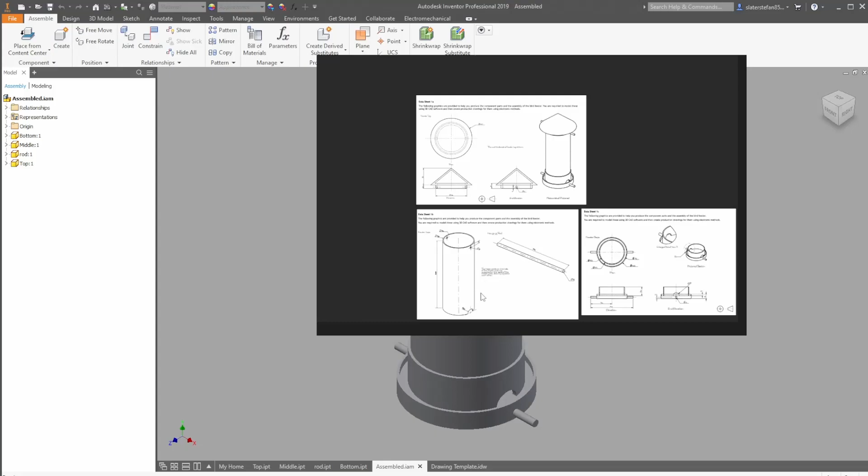Alright, we're going to be making this part of the National 5 graphics assignment. It's pretty simple for the most part - a couple revolves, a couple extrudes.

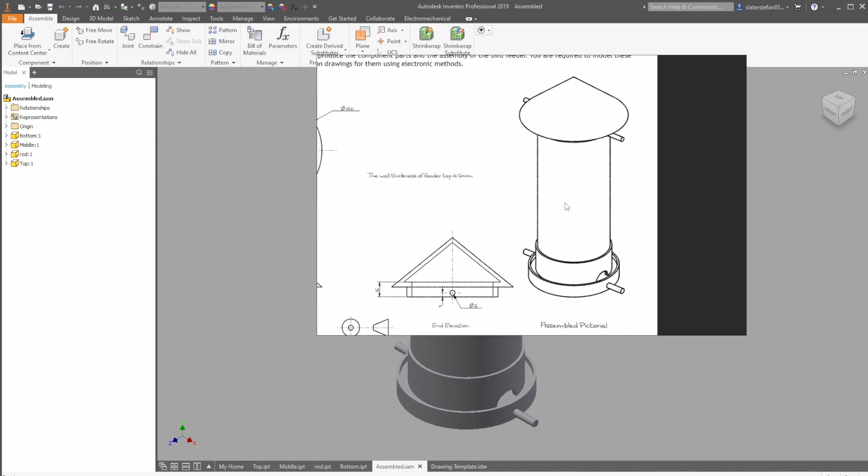This part's probably the hardest, but I'll show you some really easy ways to break this down and make it super simple for yourself. The assembling and constraining can be quite tricky - you can get yourself mixed up quite easily when you're doing this, but I'll show you a good strategy to make this pretty simple for yourself.

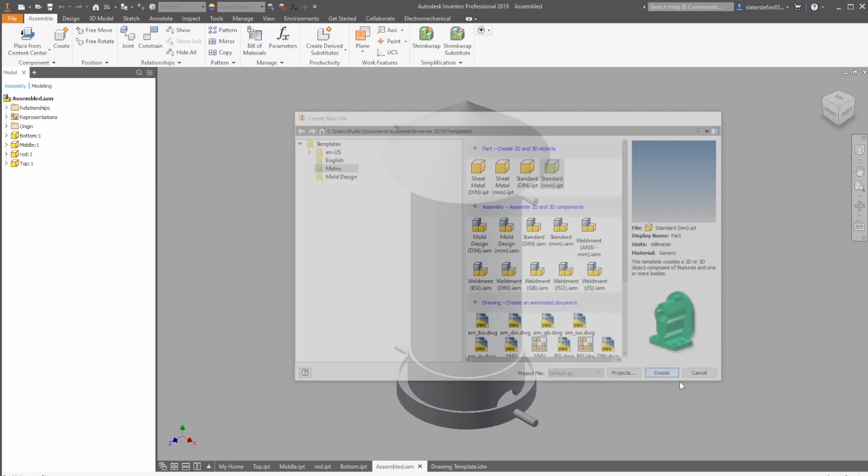I'm going to go to new, go to standard, and create a new part. I'm going to create this part first of all. I'm going to do a revolve, so I'm looking at this profile here. It's going to be a triangle with the size of 50 up, and it'll be 60 along, and this rectangle here going from 45 along and 10 up.

Start 2D sketch, click a plane, and I'm going to be dimensioning as I go as well, so rather than clicking and then going to my dimension, I'm just going to be typing in sizes. I do that by just clicking once, getting my mouse going the way I want to, and then I type in the size and click enter.

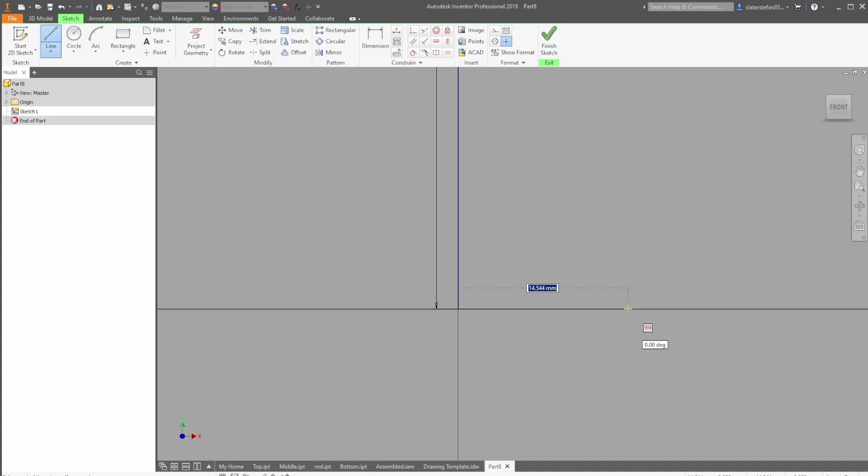Click escape, and I'll do the bottom part. I'll click, get my line in the way, and then type in 60. So I've got 50 by 60, and I'll just close up the triangle there.

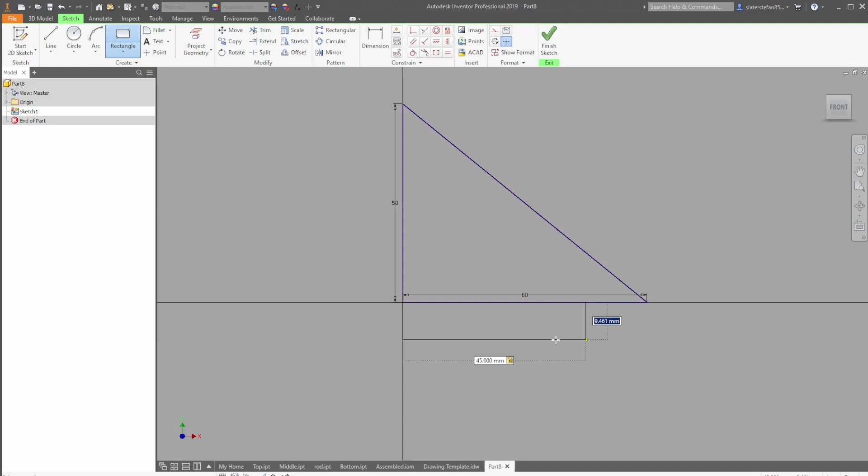I'm going to do a rectangle. I'm going to click once and move my mouse in the direction I want to go, and it's going to be 45 and then 10. To move over to the other dimension, I'm just going to click tab, moves me over, and I can type in 10 as well. You could totally just draw it and then dimension it.

Doing it that way just saves a bit of time and you get used to it, even though it's a wee bit fiddly. I'm going to now finish my sketch. I'm going to revolve it, click my 2 profiles, click axis, click my axis, and click OK.

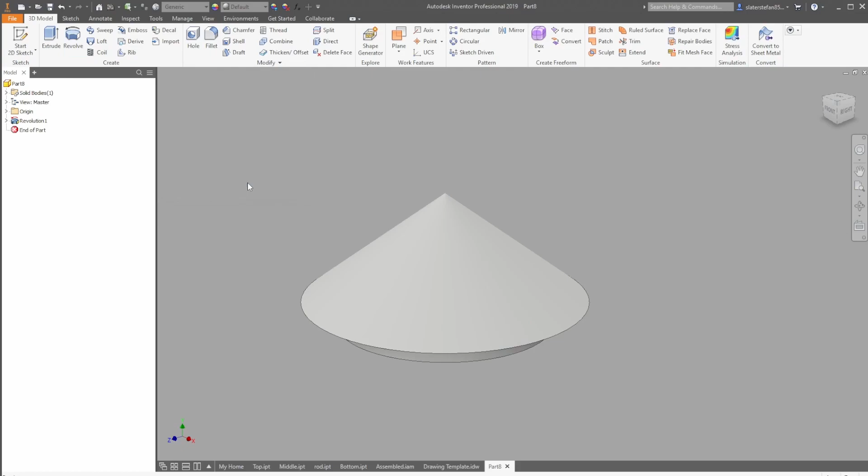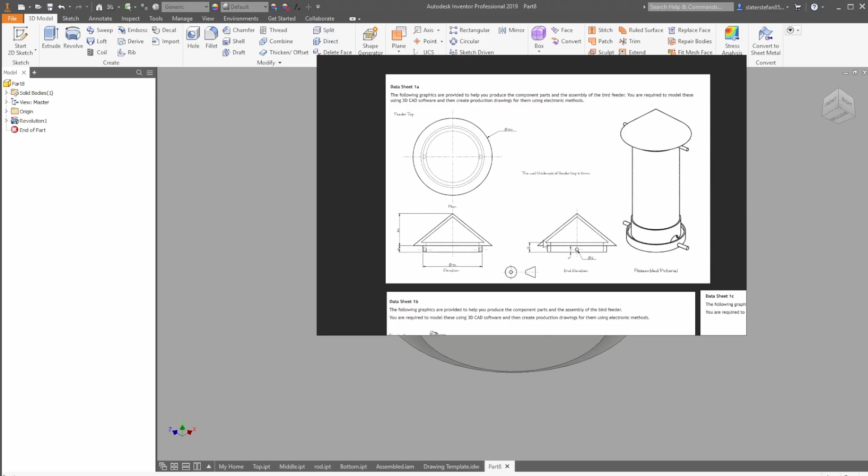Now what I need to do is shell it. It says here that the wall thickness of the bird feeder is 5mm, just this top part. And you can also tell by the hidden detail running all the way down to the bottom that this face is also removed. You don't really be able to tell that by looking anywhere else apart from this, so we know we need to remove this face.

So I'm going to go up to shell. I'm going to change this thickness to 5. I'm going to make sure I'm on remove faces - it'll do this by default, so you shouldn't have to click anything, and then you can click OK.

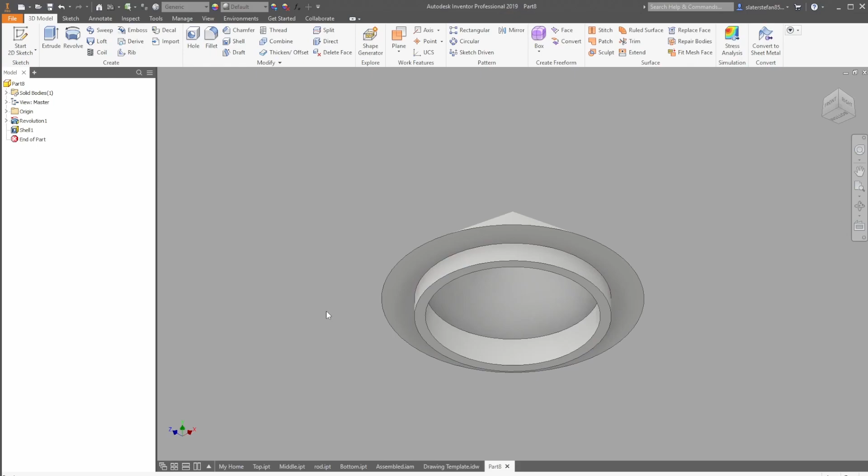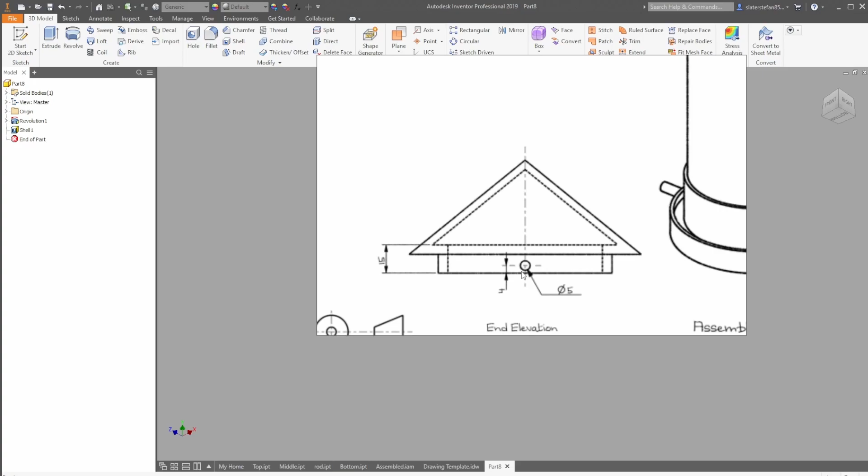Now what we need to do, it's almost done, we just need to get this hole in here, and it's really important that we get it at the right size so that when we come to assemble everything, everything's fitting, and making sure that it's the right distance away from this edge is really important as well. So it's a diameter of 5, and it's 4mm up.

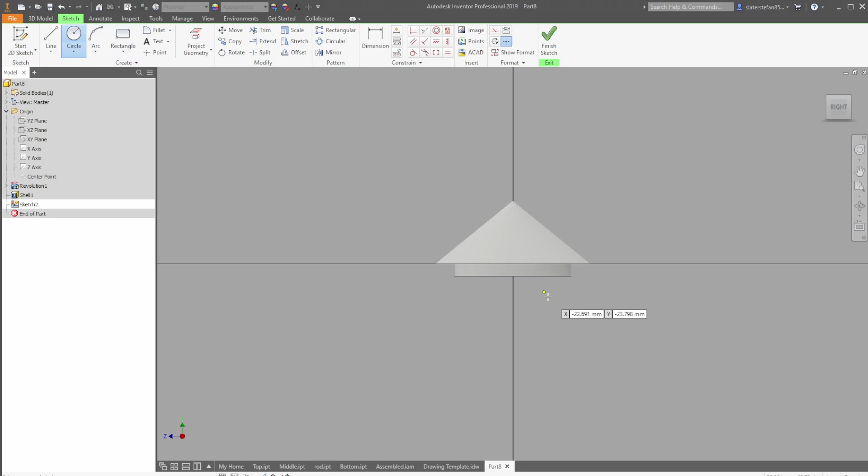I'm going to do this by starting a 2D sketch. We can't start a 2D sketch on a cylinder, so you need to go up to origin and click a plane. You could create an offset plane, but I'm just going to do it in the center and sketch it while it's a wee bit hidden. So I'm going to go to my origin, make sure I'm on that, just so I'm snapping right into the center of this.

Means I don't need to do any other funny dimensioning. I'm going to just type in 5, click enter, click dimension, and select the center of this and the bottom of this and make this size 4. Finish sketch, and you can see it's just floating in the middle.

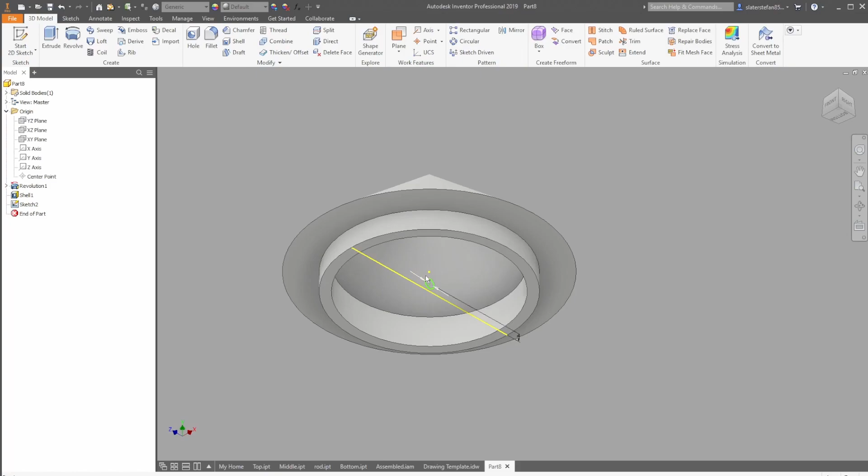So when I go to extrude, I'm going to go both ways. I'm going to go to cut, and just drag this out until it makes a hole, and click OK. So that's this first part done.

I'm going to move on to the next 2. They're pretty simple. I'm going to also save this, make it all into a new folder.

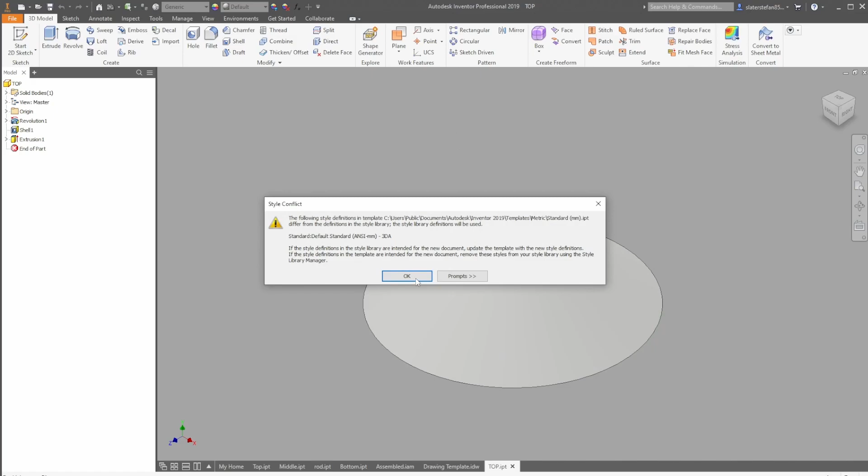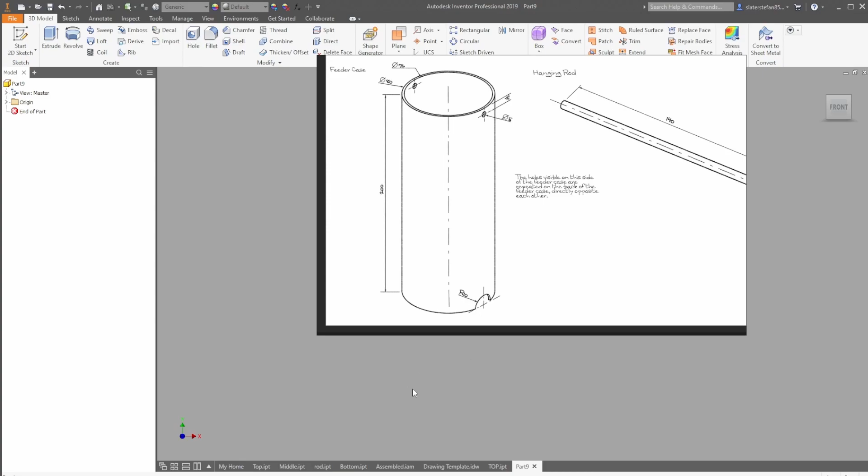Pull this top and create a new part. Only need a few sizes for this one, so we can see that the outer ring is 80, the inner ring is 76. Same sort of thing over here, but this is 6 down and 5. And this is a radius of 10, so really make sure you're paying attention when you see a radius, that when you type in you're not doing 10, because we'll have to make sure we're halving it.

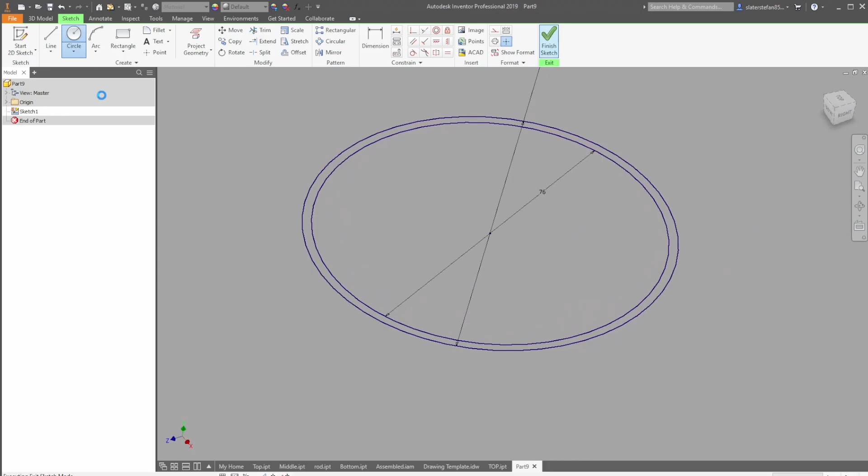So file, sketch, first circle, whoops, first circle is 80. This time I'm just going to make sure I type in 76, and then click enter. Finish my sketch, extrude, and I'm going to make this 200.

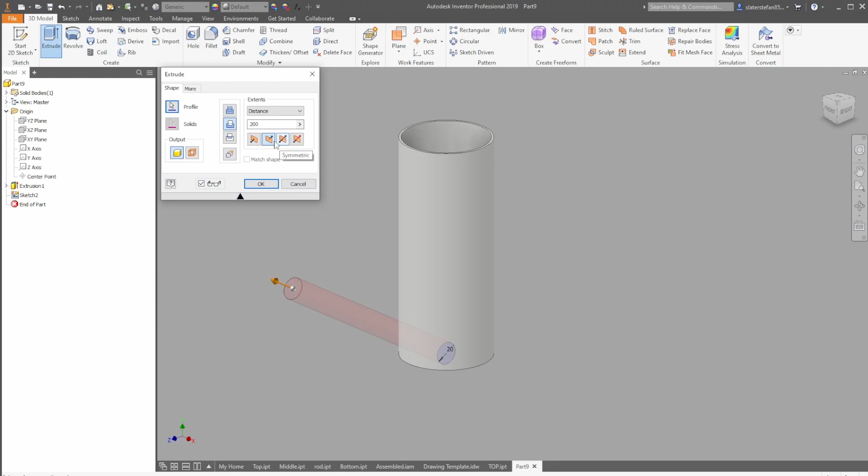Now, same thing as last time, I'm going to start a sketch on my origin. Do the bottom first. So this time I'm typing in 20, even though it says 10, because this is our diameter when you put this in. This time I'm going to send it this way. Don't need it that big. Just make sure you're on cut.

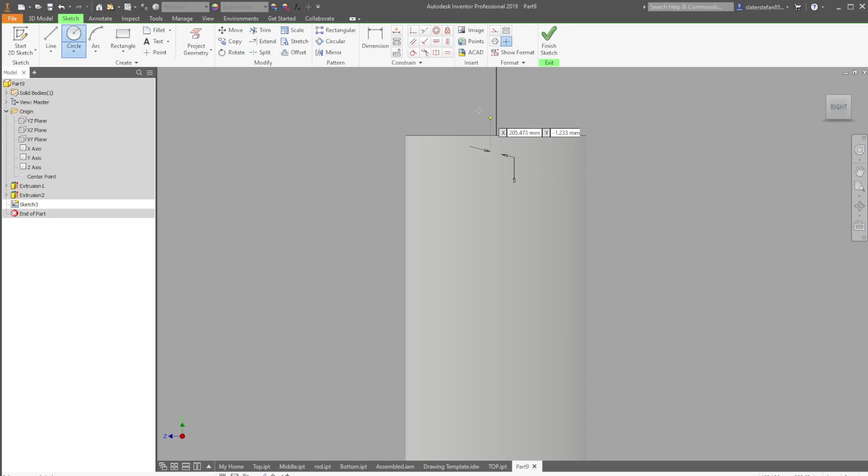And same thing. Make sure you're on the same plane. Make sure you can see this dotted line so you're on the axis. And it's 5 and 6. Finish sketch, extrude, symmetrical, cut.

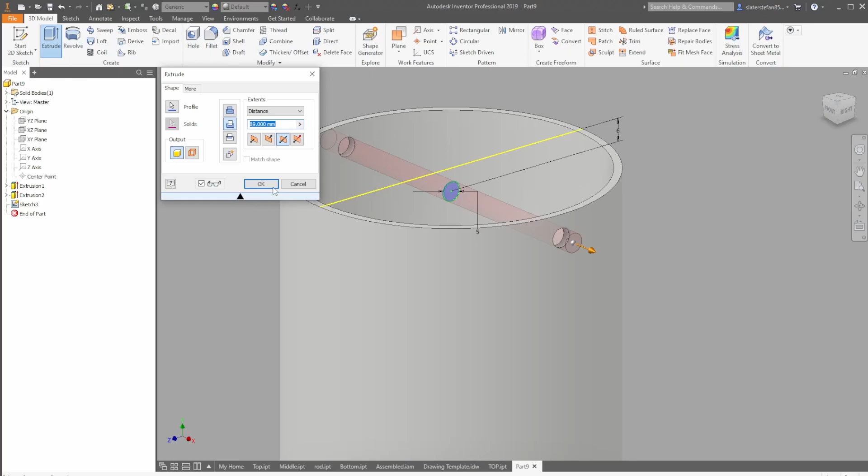And there we go. I think I just didn't drag it far enough that time. So that's that second part done. I'm going to save this, save as, call it middle, and create my next part.

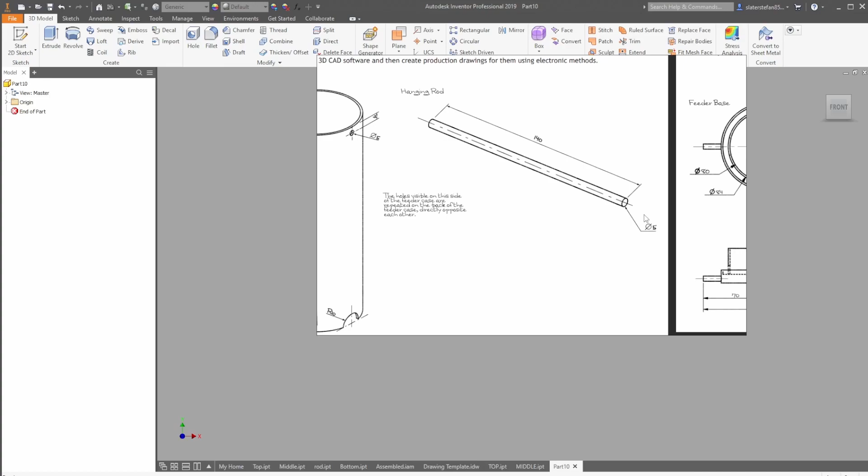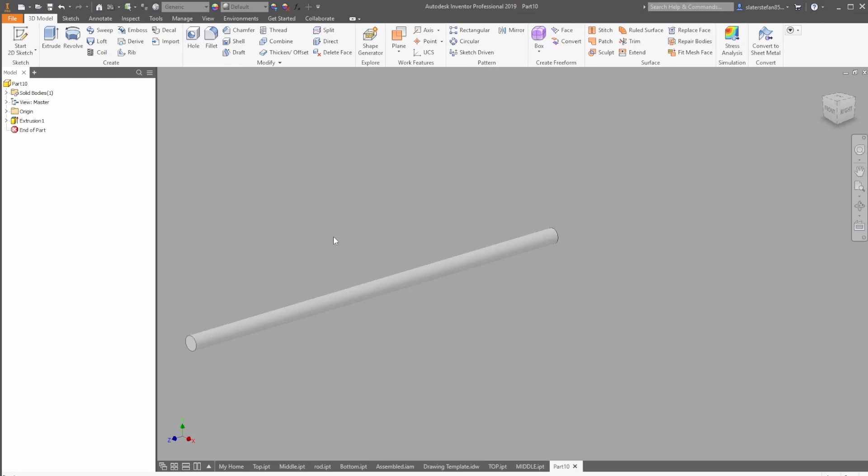So this part, pretty easy, 5mm by 140. Circle at 5. Finish sketch, extrude, 140, and there we go, that's the rod finished. File, save as, rod.

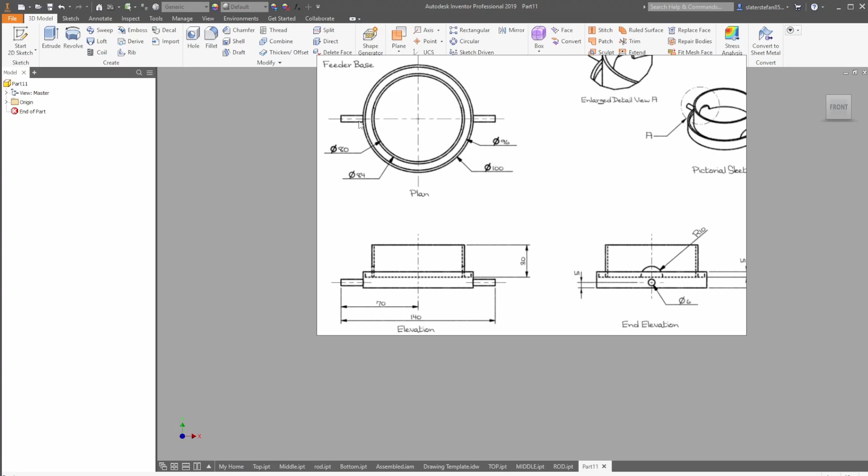Move on to my next part, file, new, and this part is probably going to take you the longest, but it's pretty simple once you break it up. So I'm going to do this base part, and then this ring part, and then this inner ring part, and then the sort of rod going through, and then the little cutout part as well.

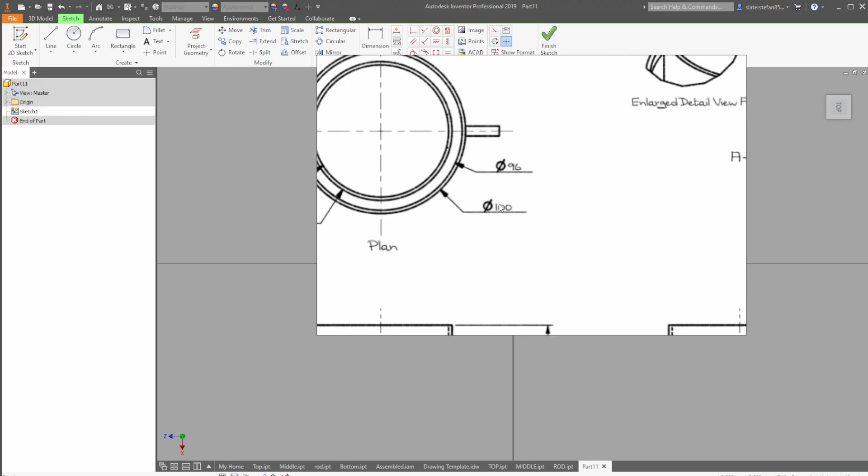So start off with this bottom part, which is over here. So I'm going to do a circle at 100, then extrude it up by 10. So it says 15, but I'm going to do my next ring at 5 up. So this one's just going to be 10. So 100 by 10.

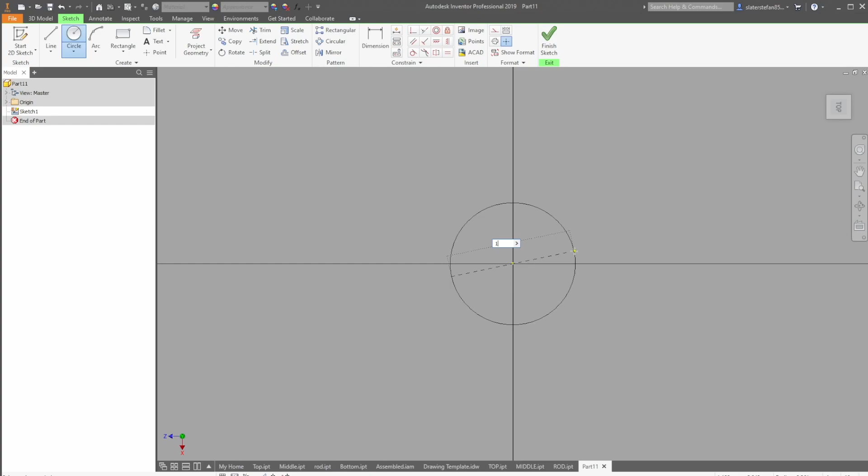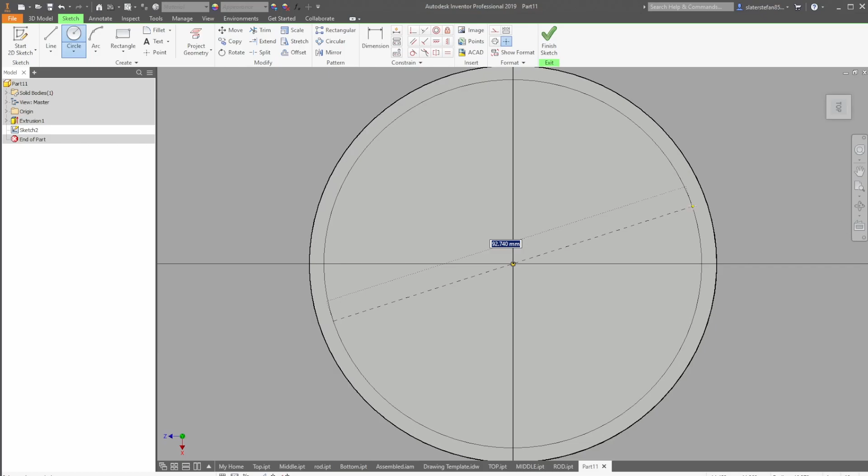And then my next ring, 100, and it is 96. And this one's going up 5. Then all I need is this inner ring, so the size is 80 and 84.

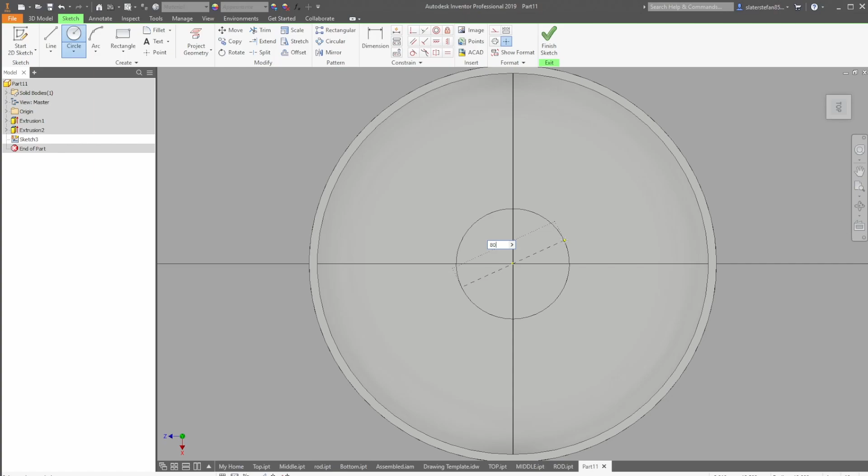Finish sketch, extrude, click my ring, and this size is going to be up 30 from the base.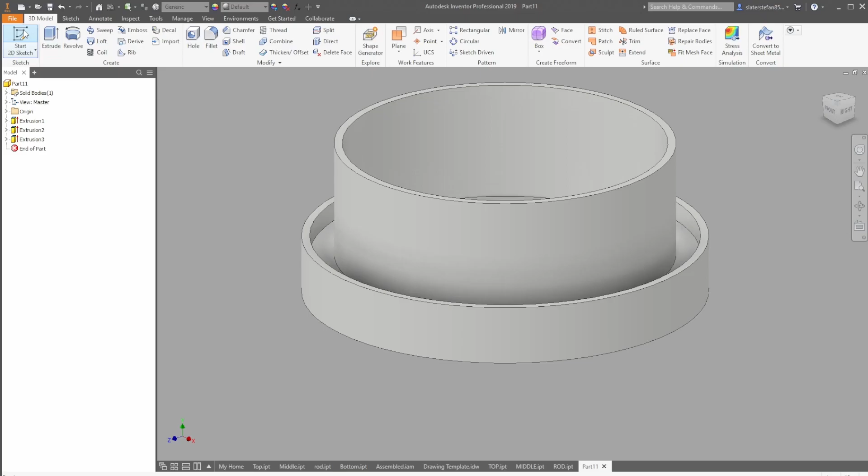Next part, going to just be drawn onto this plane again. Make sure I snap to the bottom of the base, and this side is going to be 20. I'm also going to draw a line on the base, just going straight across. This will just allow me to trim out this bottom part.

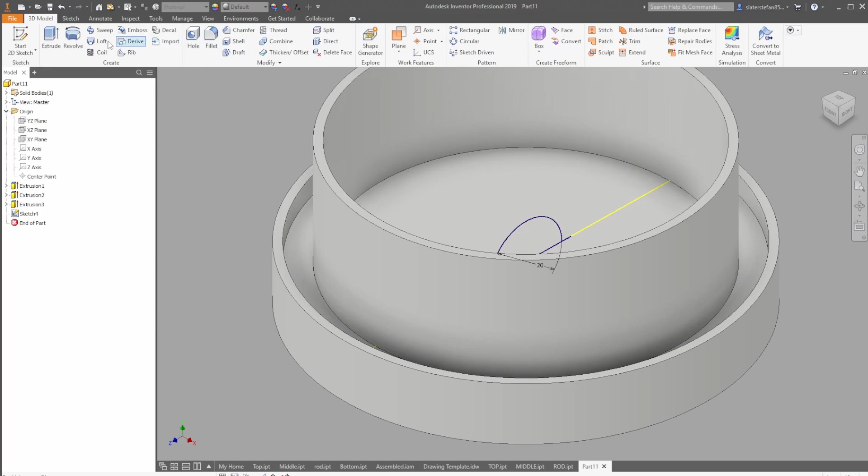Finish sketch, extrude. Do symmetrical this time, go both ways, and make sure that you're not cutting out any of this inner part, and click OK.

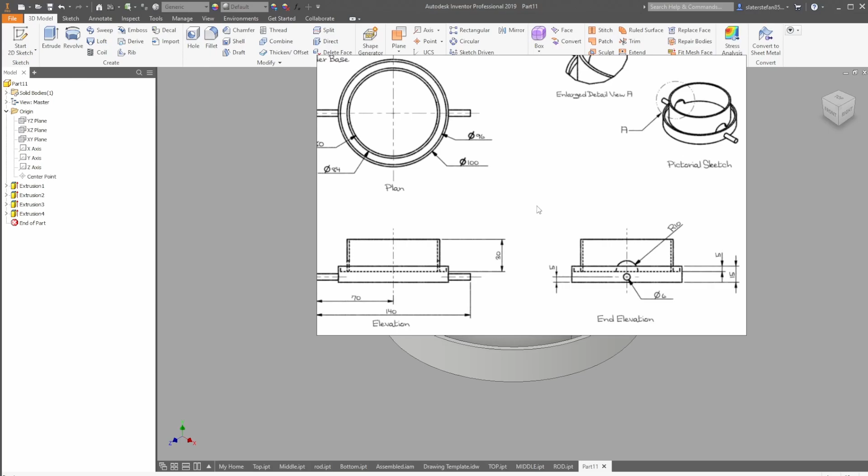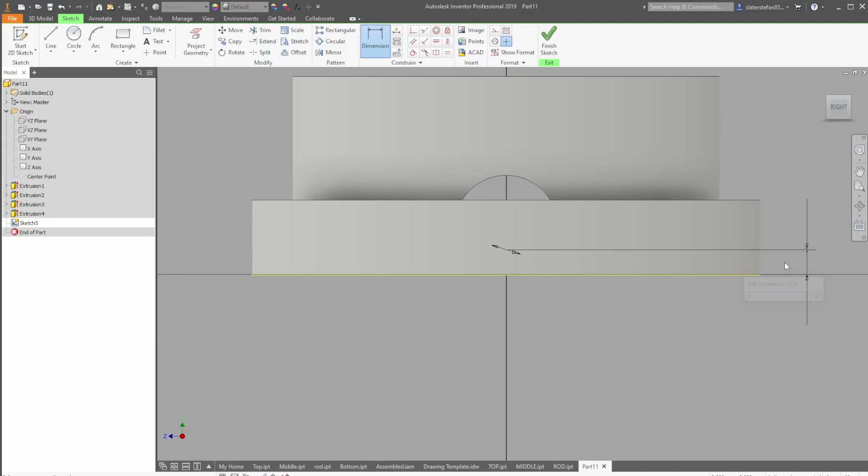And a similar sort of thing for this rod. It's going to be going the same axis, and it is 6 and it is 5 up. So, again, symmetrical, and this one has a size, so 140, and click OK. So that's all our components.

I'll save this part.

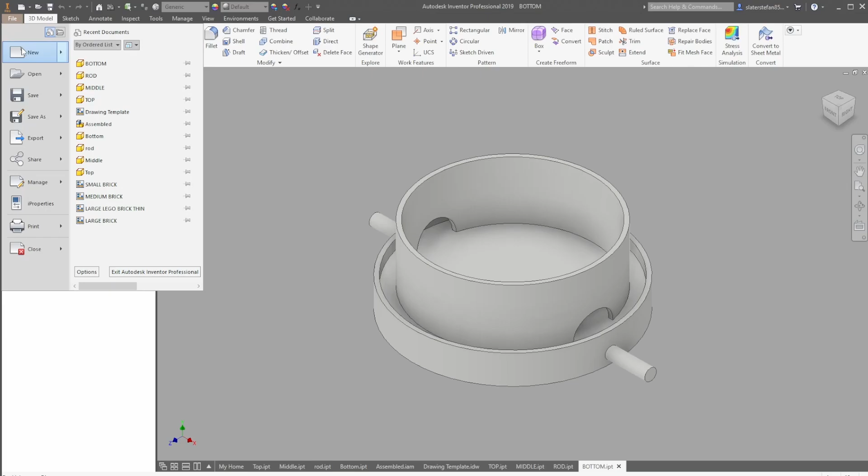This time I'm going to go File, New, into Standard mm.iam. Then I'm going to go to Place, select all my parts at once, click, and then right click and click OK.

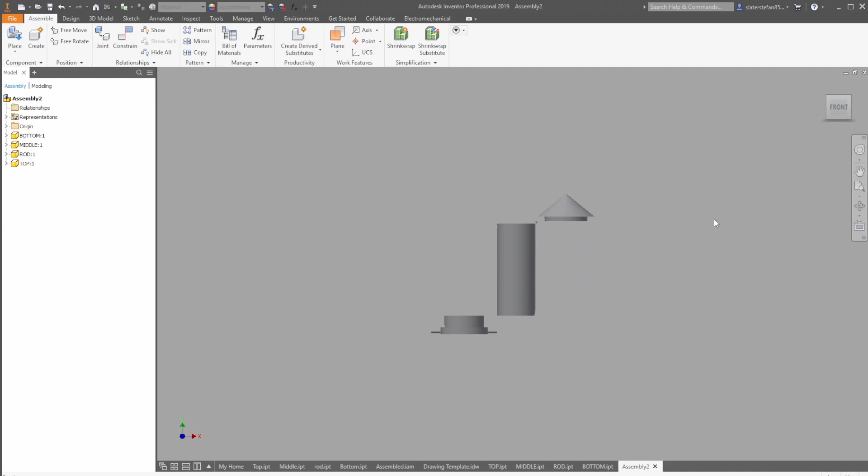So this is really the trickiest part. So far that's all been pretty easy. I'm going to first try and get this all assembled so I can still move it up and down, so I can see underneath it.

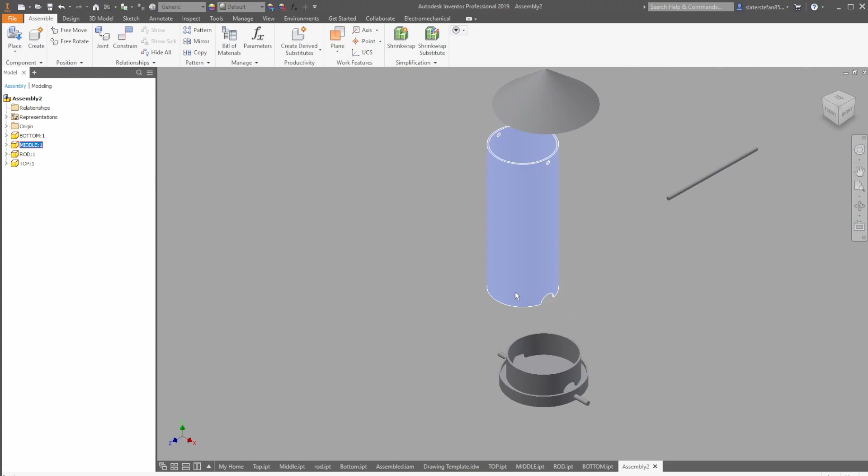So these 3 parts all assembled with just a simple mate, so these faces are all touching - the outer face of this and the inner face of this, the outer face of this and the inner face of this. Then put the rod in, put the rod into this part, and align the rod to this rod so that it's all in line, and just put this into place.

Sometimes it can take just a few attempts, so don't be afraid to remove any constraints or just undo and go back to the start and try again, but I'm trying to make this as simple as I can.

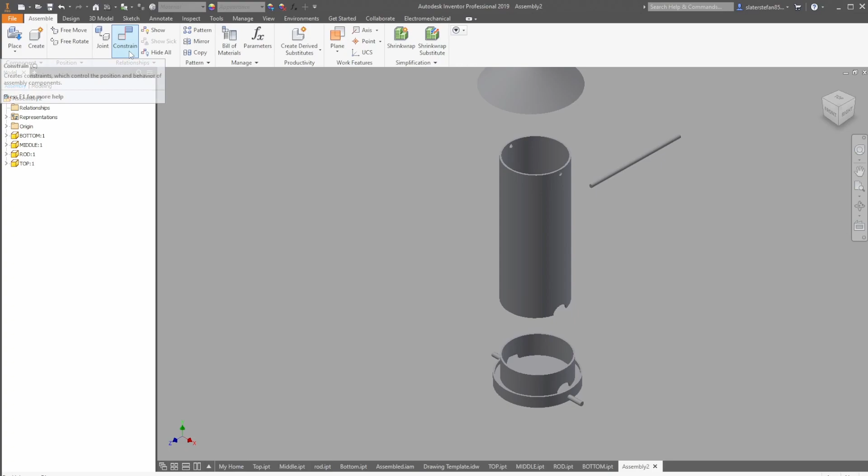I'm going to go to Constrain, and click Mate. It's already going to be selected. I'm going to click this outer face here, and then this inner face, and that will join them together.

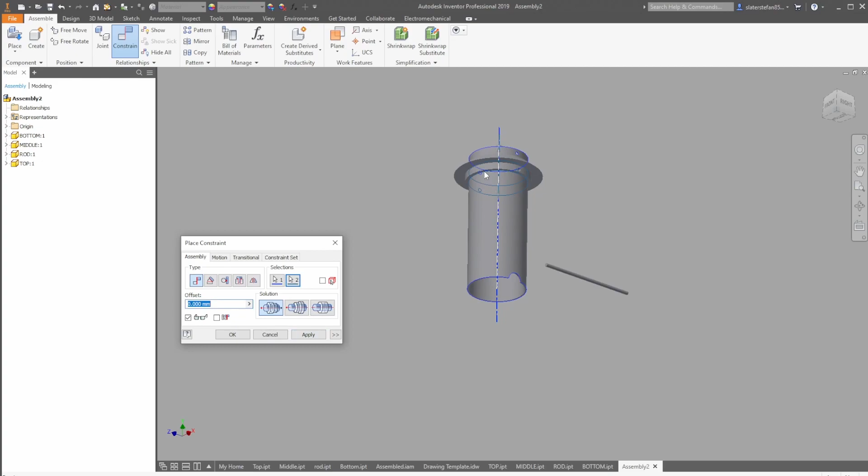If it puts it in upside down, you sometimes need to move this all around, but this is fine for me, so I'm just going to click Apply, and cross this off just so I can move it up and down. So I can still move this pretty freely, which isn't what I want in the final, but for now this will work.

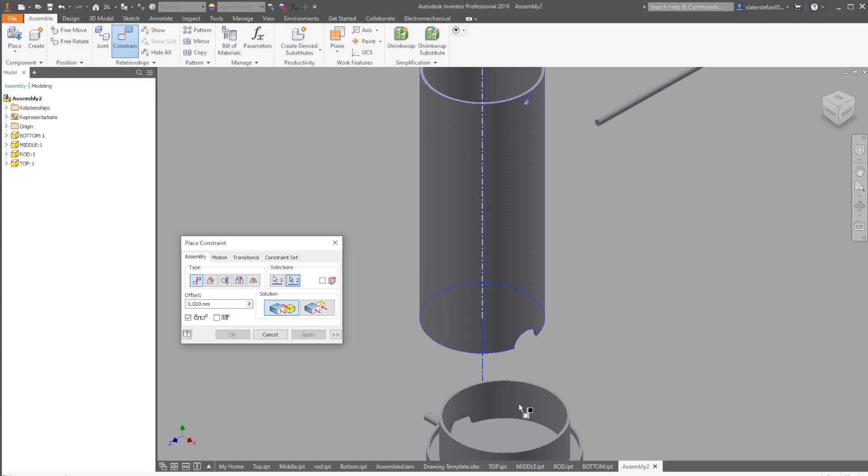Then I'm going to do the same with the bottom. Go to Constrain, click the outer face, click this inner face, and in this instance it has flipped upside down, so I'm just going to click that, click Apply, cross it off and move it up. So I can spin this round, move it round, and move it up and down.

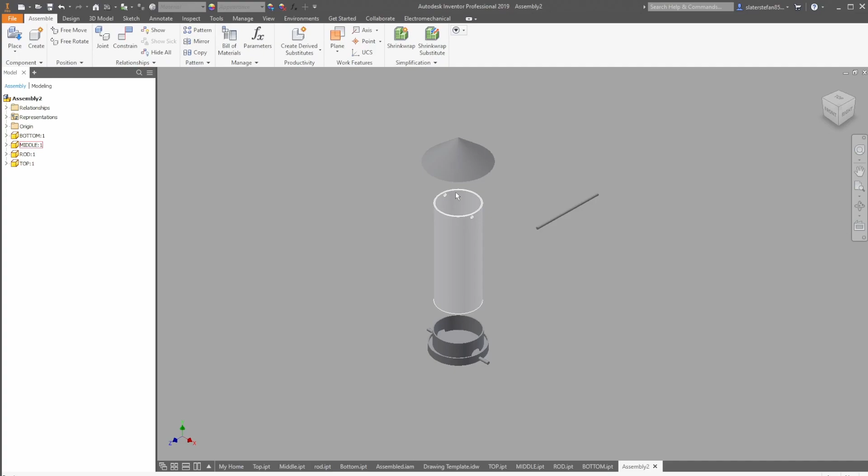So now we just need to start aligning these things. I'm going to align these both first. So there's 2 holes - one on this top one and one on the bottom part. I'm going to use the rod to align them.

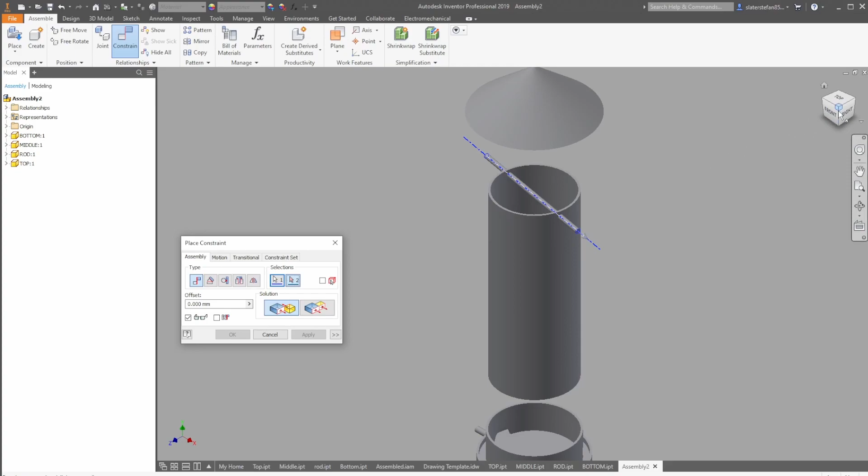I'm going to click Constrain, click the rod, and click this part and just click Apply. Then I'm going to click the rod again, and click this circle. Make sure you get that center line going all the way through it as well, and it will align them both like so.

Now what I need to do is set a mate, so I can still move this left to right. I can't move these around anymore, which is good, and I can't move it up and down, so these are aligned properly. I just need to get this put in place so I can't move it anymore.

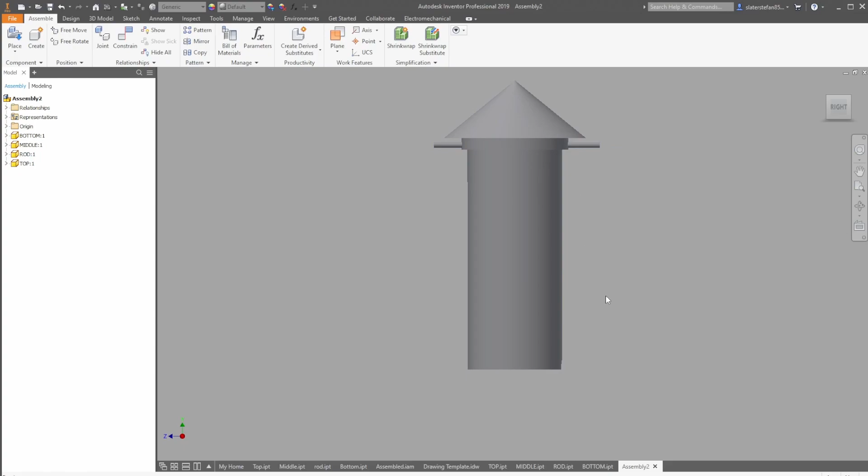For that I'm going to use the mate tool again, so Constrain, Mate, but this time I'm going to use Flush. I'm going to click the end of this and the end of this, and that puts them in line with each other. And now if I try and move the rod, the full thing's moving.

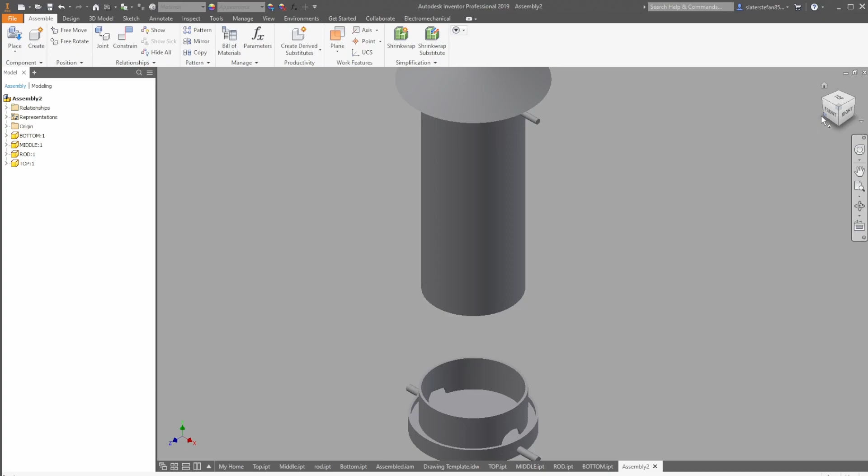Now I just need to put this into here, so I can do that again by using Constrain. I'm going to select the bottom part of this circle, the bottom part of this circle, and there we go.

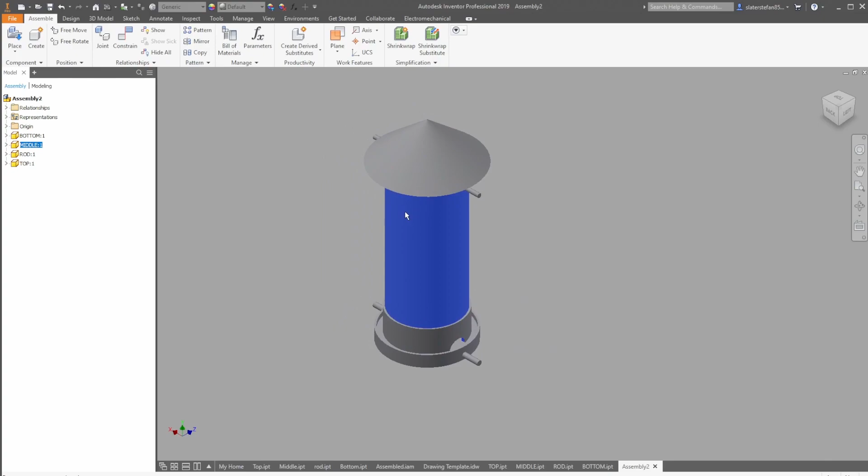So when I first did that, it did take me a few tries, but it might take you a few tries too, so if so, just undo it, keep trying, but that's it.